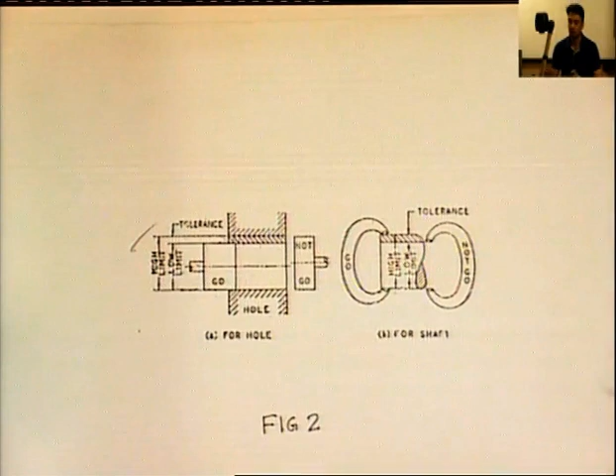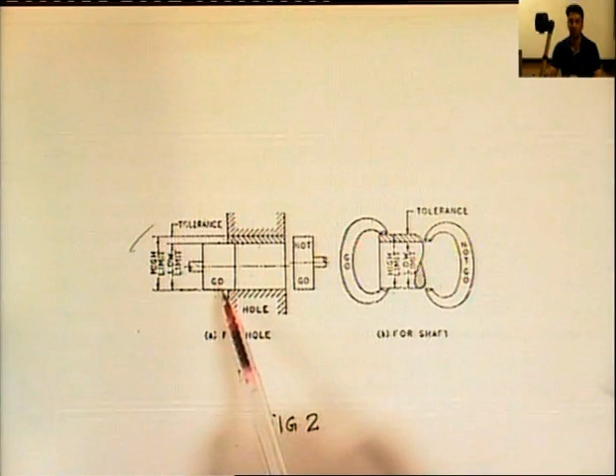Since the dimension of component should be within specified limits, one of the gauges is called go gauge, which should pass through or over the part, and not go gauge, which should not pass through or over the component, as shown in figure 2. So, you can see the interference part over here, shown with the hatched part. So, a go gauge, which is shown on the left hand side, also signifies the lower limit of the dimension.

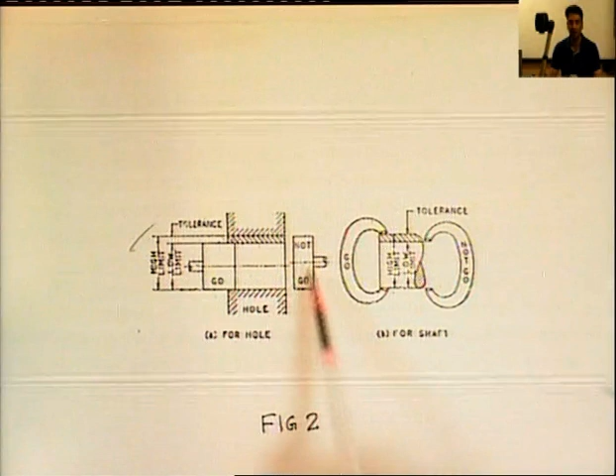This go side should be able to enter into this machined hole, where the part is being checked whether the machining is done properly or not, has the hole been manufactured properly or not. So, this go side should be able to enter into this hole for the checking of hole type or gap type of dimensions. And the second side of the limit gauge is the not go gauge, which should not be able to enter into this hole. So, this interference over here, which is shown as a hatched part, is called the tolerance.

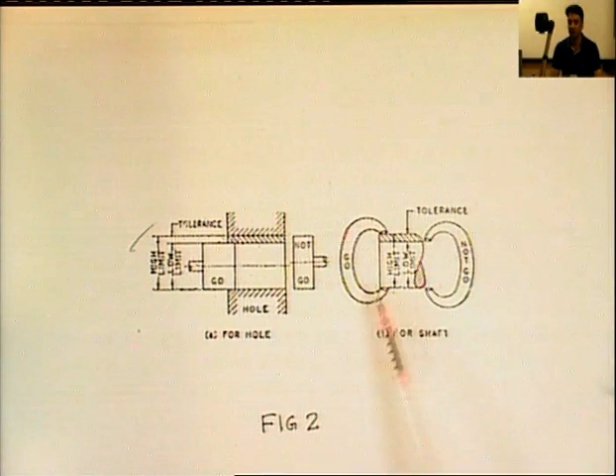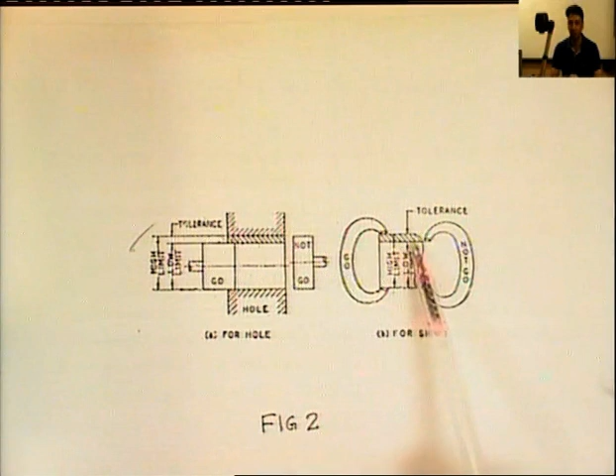And similarly, for the male parts or the external dimensions, we see on the left hand side the go gauge is slightly larger than the not go side of the gauge. The gap over here is slightly larger for the go gauge, and the gap over here is slightly lower than the gap of go side gauge. So, this is the interference over here. All the parts which lie in this high limit and the low limit will pass the test, and they are acceptable. So, with these go and no go gauges, we are just trying to find out which parts are acceptable and which are not acceptable.

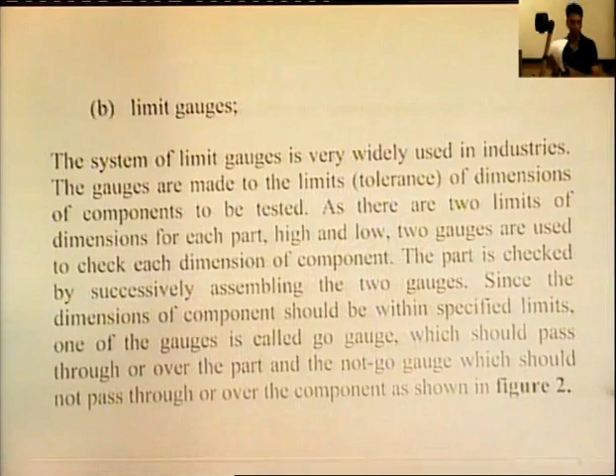So, with this kind of inspection with limit gauges, we are easily able to find out the components which pass the test, which are successful, and the parts which do not pass the test and are thrown into the rejected lot. Then another way of classification: the gauge should pass over or through the part under its own weight. So, this is very important, that the gauges should be made light in weight, and they should be passing over or into the part. That is why sometimes we are making hollow gauges also, because that reduces the weight of the limit gauge.

So, another classification is according to purpose. Number 1, workshop gauge or working gauge. Number 2 is the inspection gauge. Number 3 is purchase inspection gauge. Number 4 is the reference or master gauge. So, these are the different gauges which are used in different situations. The gauges used in most situations are the number 1 type, which are used in the workshop while the manufacturing is going on. The operators are themselves using these gauges to find out what they are producing.

And second type of gauges are the inspection gauges, which are used by the supervisors or the quality control department, wherein these gauges are made more accurately, and it can be checked whether the parts have been produced in the right quality by the workers or not. And then next is your purchase inspection gauge. Before buying, the parts are to be tested, and if the part is tested okay with help of purchase inspection gauge, then the parts can be purchased.

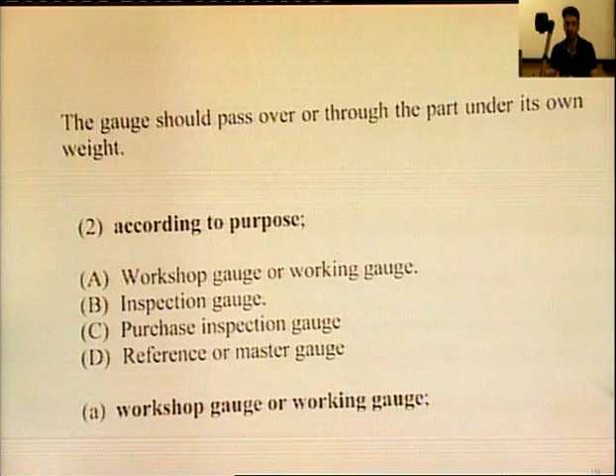Then we discuss these types of gauges in detail. Workshop gauge or the working gauge. It is used by machine operators to check dimensions of parts as they are being produced. These gauges actually have limits within which the components should fall. Gauges are so designed and used such that dimensions of parts can be kept near to the middle of the tolerance.

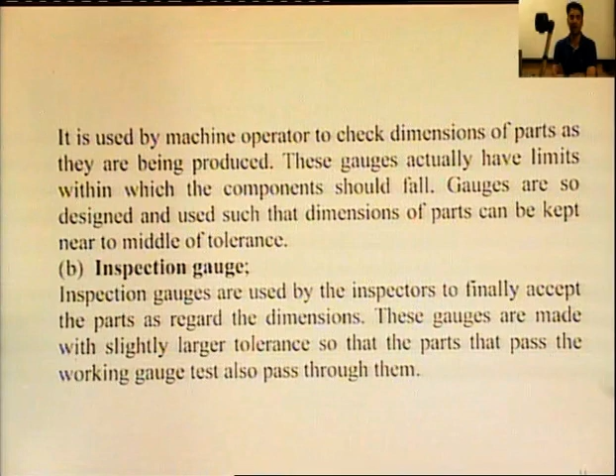Then second type of gauges are the inspection gauges. Inspection gauges are used by the inspectors to finally accept the parts as regards the dimensions. These gauges are made with slightly larger tolerance so that the parts that pass the working gauge test also pass through them.

Next type is the purchase inspection gauge. The need for such gauges arises when products from different plants are to be accepted. It is to be kept in mind that parts that are purchased may have been checked with worn out gauges. As such, it is necessary to check again on your own.

Then another, the final type of gauges, is the reference or master gauges, which are very expensive. This type of gauges are used only to check the condition of working gauges, to check them for accuracy and general wear and tear. Reference gauges are reverse or opposite in form of the working or inspection gauges.

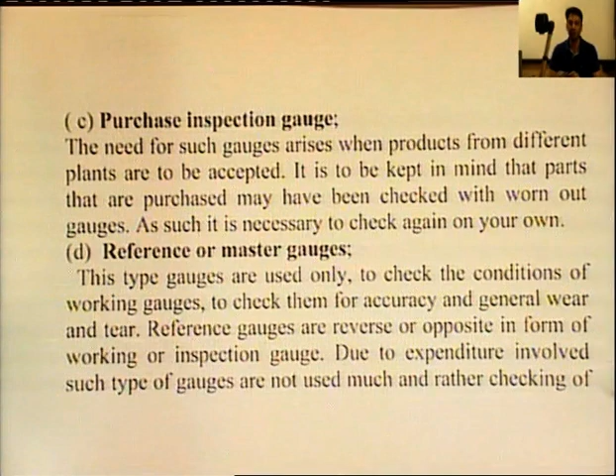Due to expenditure involved, such type of gauges are not used much, and rather checking of conditions of working gauges is done by means of measurement with accurate measuring instruments.

Then another classification type is according to form of tested surface. According to form of tested surface, the gauges are of two types: gauges for testing holes and gauges for testing shafts. Gauges for testing holes are called plug gauges, and those used for testing shafts are called snap or gap and ring gauges.

So according to form of tested surface, we have number one, plug gauges. Plug gauges are used to check holes or gaps, which are shown in figure 3. So let us see first of all the plug type of gauges, which we have earlier discussed in the beginning of the lecture. These are the plug gauges. Number one is the integral end type of plug gauge. Number two is the renewable end type of plug gauge. Number three is hollow end type plug gauge, and number four is progressive type of plug gauge.

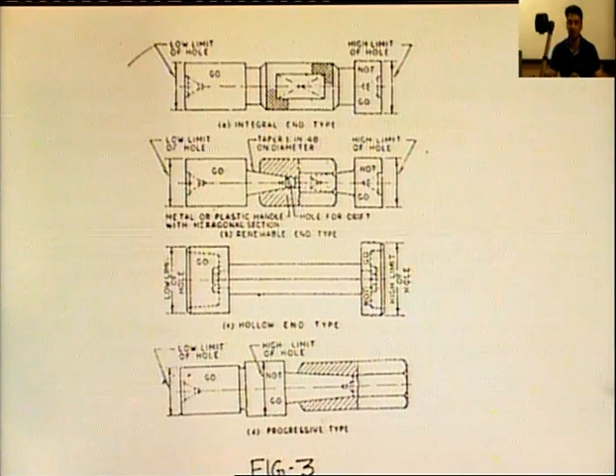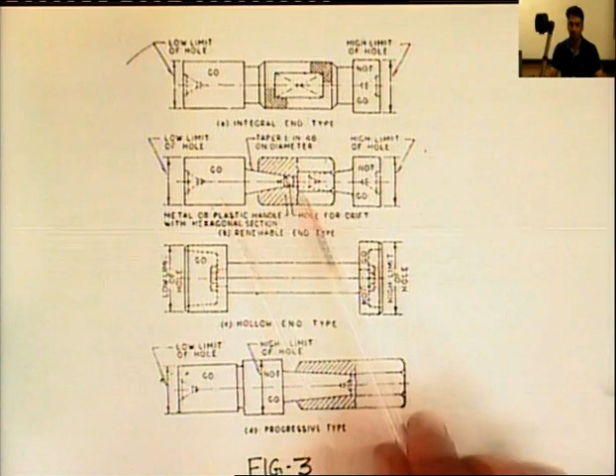So the manufacturing of these different gauges is different. You can see the top one is an integral part. The go and no go is on the left hand side and the right hand side, and this type of gauge is a one piece limit gauge. You can have the limit gauge in three pieces also. The left hand side is the go gauge side, the middle is the handle, and on the right hand side is the not go side.

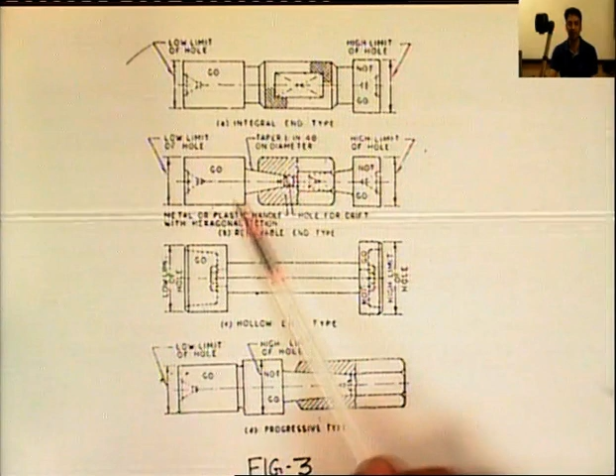So in this type of limit gauge, we have the advantage that if one of the sides of the limit gauge wears out or is damaged, we can replace the one end of the limit gauge rather than throwing it away, which has to be done in the number 1 case where both the parts are integral. If one side goes wrong, it will have to be thrown. For the second case, if one side goes wrong, this side will be replaced with a new one.

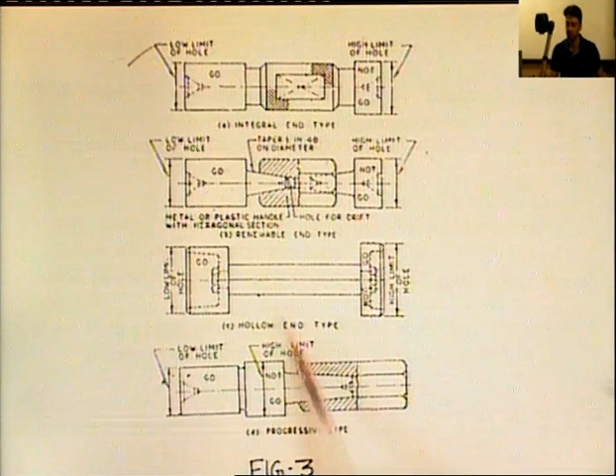Number 3 type over here is hollow type, which is made hollow on the left and right hand side for the reason that the weight of the limit gauge is reduced with this. So it should be easy to handle. It should not produce too much fatigue in the operators.

And number 4 is the progressive type of gauge, in which you don't have to reverse the side of the gauge. Go and not go are made on the left hand side while you have the handle on the right hand side. So this is different from the above 3 plug gauges, because go and not go sides are both on the left hand side of the handle.

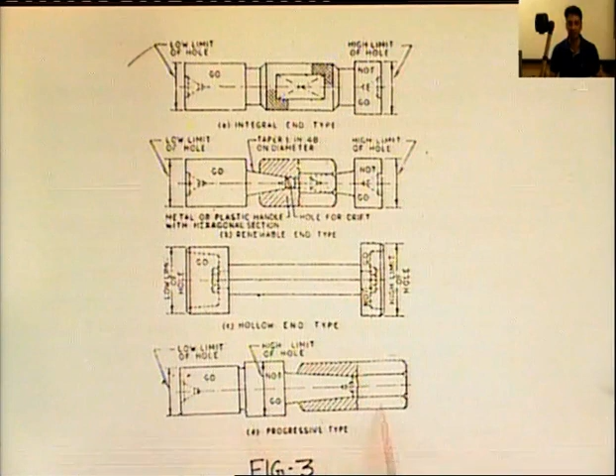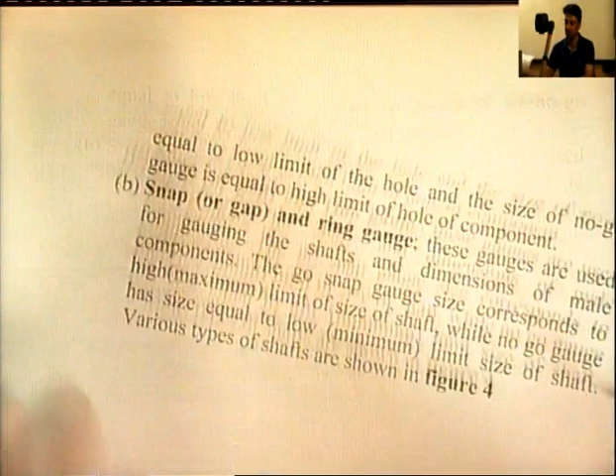The go plug gauge has size equal to low limit of hole, and size of no go gauge is equal to high limit of hole of component. The next classification is snap or gap and ring gauges. These gauges are used for gauging the shafts and dimensions of male components.

The go snap gauge size corresponds to the high or maximum limit of size of shaft, while the no go gauge has size equal to the low or minimum limit size of shaft. Various types of shafts are shown in figure 4.

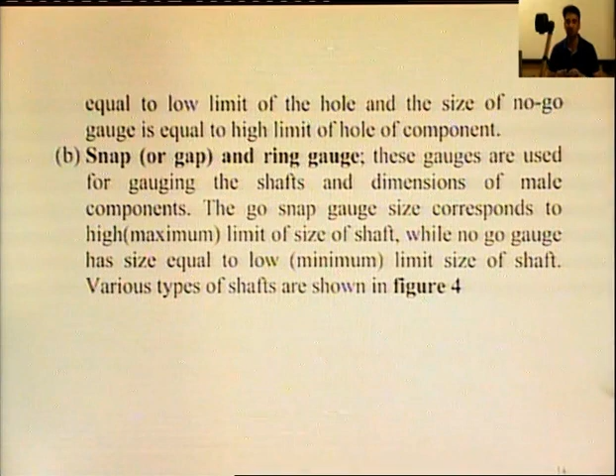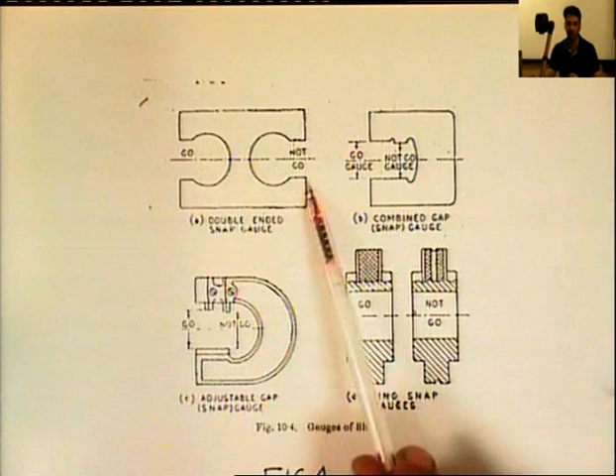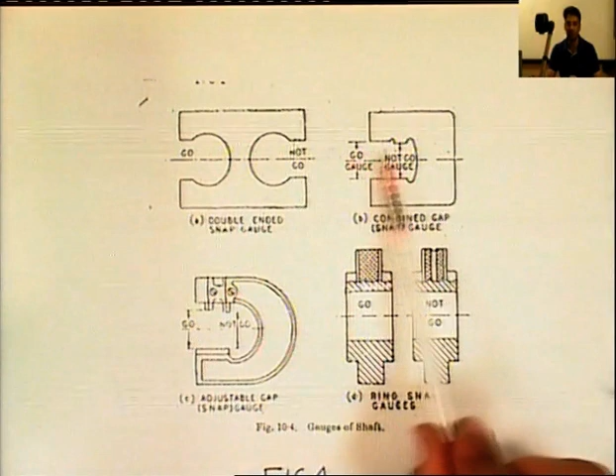So for external parts, we have number 1, double ended snap gauge. On one end you have the go side and on the other side you have the not go side of the limit gauge. Then the second type of limit gauge for shafts or external parts is showing the go side and the not go side on the same side. So the gauge is not required to be reversed to check the part. The part should be entering the go side and it should not be able to enter into the not go side.

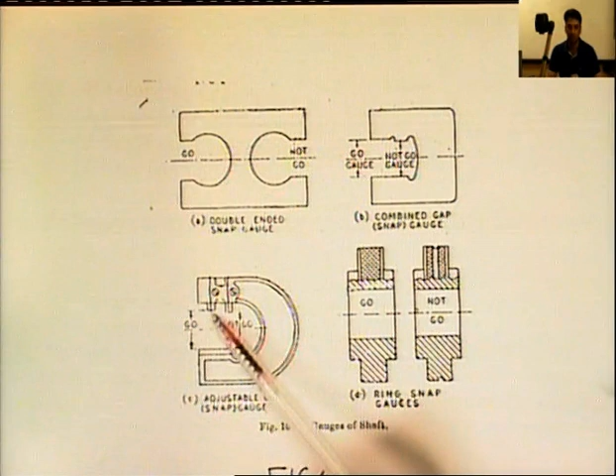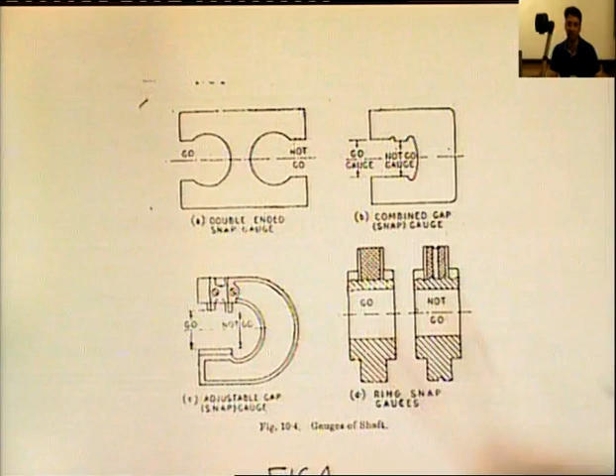Another type of gauge for external measurements is this adjustable gap snap gauge, in which this anvil can be adjusted to a suitable dimension. So the first anvil is for the go side and the second anvil is for the not go dimension. Similarly, for external parts, you may have to check for ovality of the part also. So in this we have ring snap gauge, in which the go ring snap gauge will be having a hole of bigger size than the not go side of ring snap gauges.

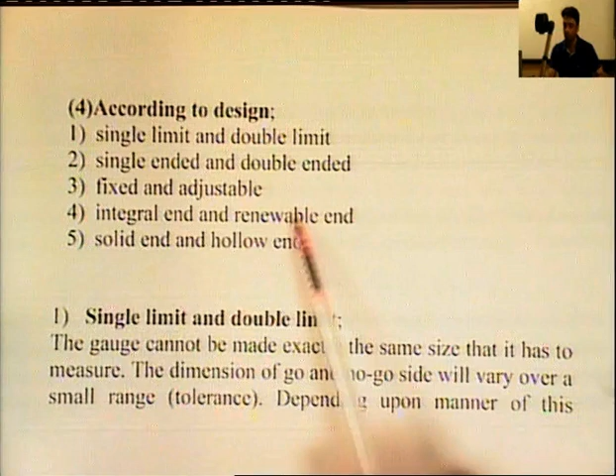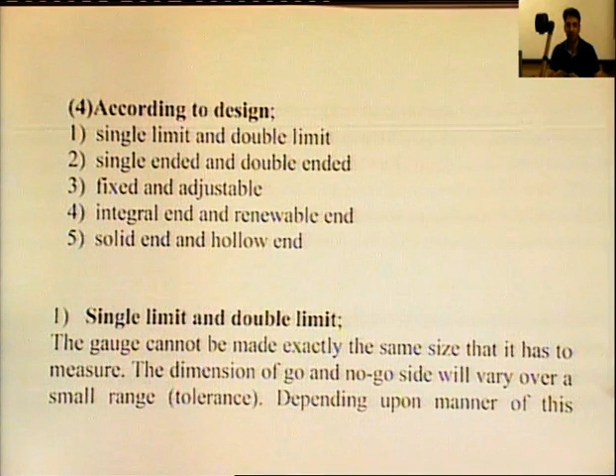Then classification may be done according to design: number 1, single limit and double limit. Then next is single ended and double ended. Number 3, fixed and adjustable. Number 4, integral and renewable end. Number 5, solid end and hollow end. So we can discuss these single limit and double limit gauges. The gauges cannot be made exactly.

So we have learned all this in our lecture today for limit gauges.